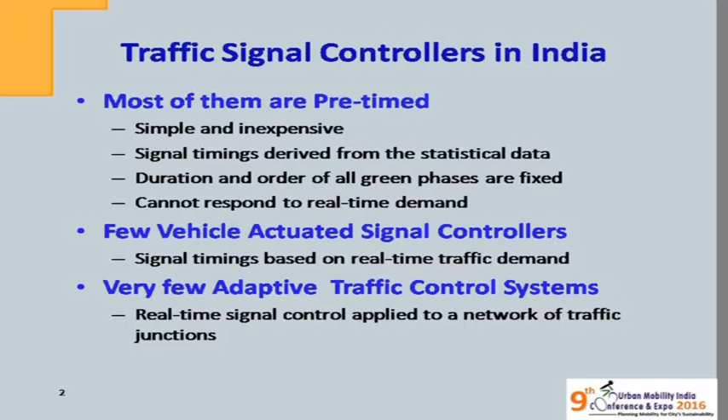And very, very few adaptive traffic signal control systems. In adaptive traffic signal control systems, real-time signal control is applied to a network of traffic junctions. So let's briefly see what all these things are. The pre-timed traffic signal control system is pictorially represented in the slide. This has no real-life interaction.

A lot of signal programs are developed based on the statistical information for different time slots of a day and different days of the week. And the signal control equipment simply looks into this timetable, and based on the time and day, that is executed.

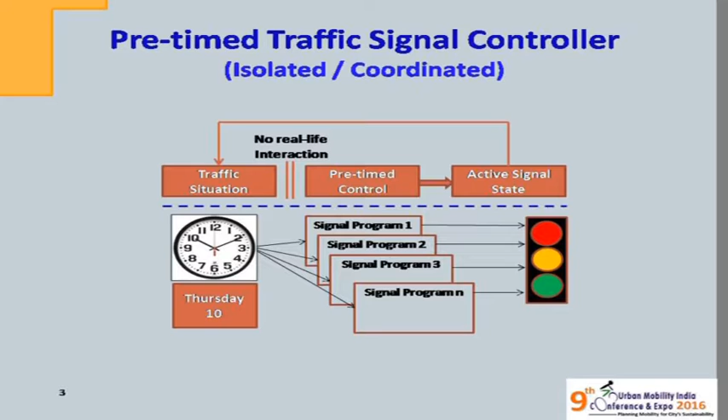So the result of this kind of system is it can cause unresolved queues, and probably we all have experienced that the green signal is shown to a road where there's no traffic, while unresolved queues are there and we are unnecessarily waiting on the other roads. So this is one major problem. But another advantage of this kind of signal controller is that it can be coordinated very easily. Signal coordination is a technique to reduce stopped delay and improve travel time.

Often we might have experienced that while driving on a corridor, at every other traffic junction we are getting a red. The moment we reach the signal, the green is lost and we are supposed to stop there. We wait for the green, drive to the next junction, and again we are getting a red. This can be easily tackled using a technique called signal coordination. This gives a progressive green signal at consecutive intersections when traveled at a specified speed. So that's a constraint: traveling at a specified speed or a design speed.

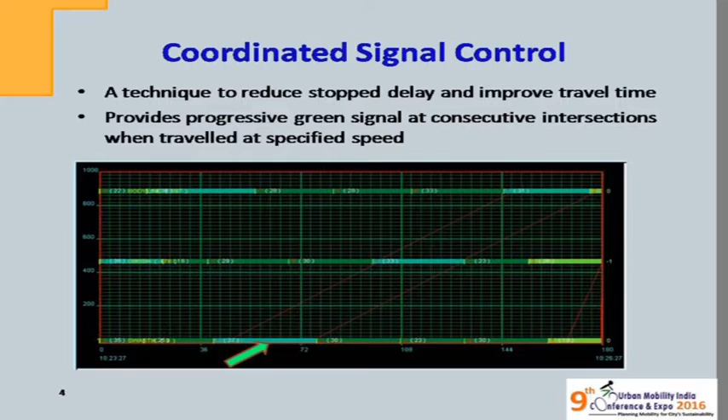Most of us might have heard of signal coordination, but there are a lot of myths about signal coordination also. The first thing is, we take a number of junctions in a corridor and try to coordinate them, so any type of junctions can be coordinated. That is the general thinking. But it's not like that. It has a constraint on the cycle length, that is, how much time is required to serve all the 4 roads if it's a 4-arm junction.

So we can bring the junctions into a coordinated group of controllers only if they have similar traffic characteristics, or they should agree on the same cycle length. Only then can they be brought under a coordinated group of signals. Another myth about signal coordination is that if it is enabled, all the vehicles getting the green at the first junction can go through the entire set of junctions without interruption. That also is not true.

Because another constraint in implementing it is the ground speed. There is a design speed, and there is a practical speed also. The practical speed varies depending on the congestion, because speed is a function of the density of the traffic. So at the most, we can expect 70 to 80% of vehicles getting the synchronized signal while traveling on a corridor. And another thing, people expect that it can be synchronized in all directions. That also is not possible practically.

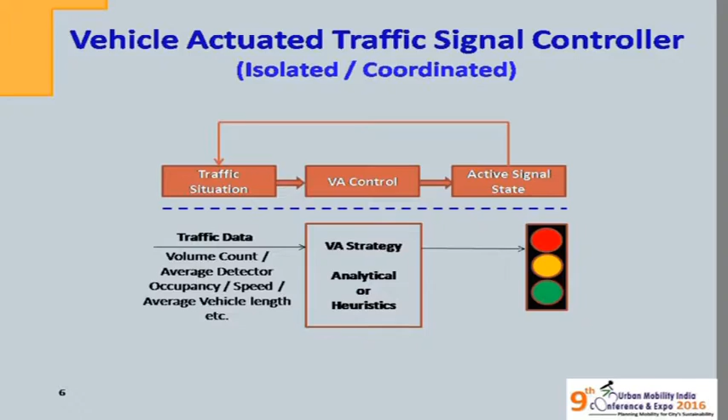Now we come to the vehicle actuated signal controller. That's another type of advanced controller we have. Vehicle actuated signal controllers use vehicle detectors to assess the real-time traffic demand on the road and accordingly modify the signal timings. So there is a real-life interaction. Traffic data is collected, like vehicle volume count, average detector occupancy, speed, average vehicle length, and that kind of thing. The signal can be vehicle actuated, but it requires at least 10 parameters if you are applying an analytical method.

And it is possible to have some heuristic methods where it can be realized with a lesser number of parameters, input parameters. For the vehicle actuated signal controller, we want to assess the real-time traffic scenario. And for that, we are using some electronics or some others.

And there are n number of different vehicle detectors available, starting from the inductive loop, which was the most popular one. In the inductive loop, across each lane, a wire loop is kept. And when a vehicle intercepts that wire loop, the change in the inductance is measured or identified by the electronics connected to it. And that identifies that's demand or that's a vehicle.

It's cheap. It's difficult to implement because it's intrusive. We need to cut the roads and put it and seal it. And it's easy to get damaged also. And then the camera-based system came. So some video analytics is used, and that identifies the motion detection.

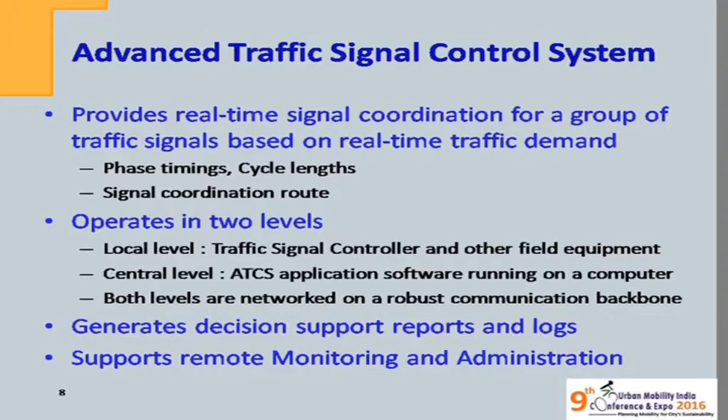So now what is happening is, 99% of the decisions are based on perception. I say the junction is congested. How much congested? And is there a scope of improvement? So some data is required, and these advanced traffic signal controllers provide that information. And it supports remote monitoring and administration also.

So maybe there are 1,000 junctions in a city like Delhi. So it is possible to bring all the 1,000 junctions to a central common control and monitor and manage it from the center computer. So the ATCS also can be in different flavors. That is the traffic responsive system and the adaptive signal control system.

So the traffic responsive system selects an appropriate signal plan from a library of coordinated signal plans based on the real-time traffic demand. So if you look closely, this is more or less similar to the pre-timed signal controller, where we are having a set of timetable, and based on the time, the signal plans are selected and executed.

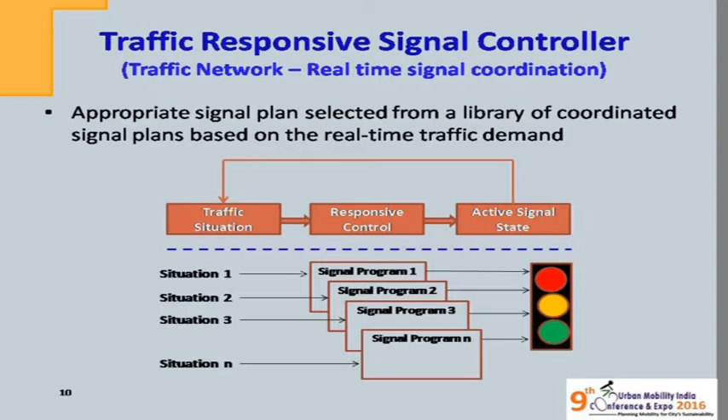So the adaptive signal control, this is a real-time system that collects the traffic data and generates the signal timing and appropriately coordinates it in real time. So there are at least a dozen different operational models available across the world on the adaptive signal controller, starting from ACS Lite, Balance, InSync, LATCS, Motion, OPAC, RHODES, SCATS, Scoot, UTOPIA, and CoSiCoSt.

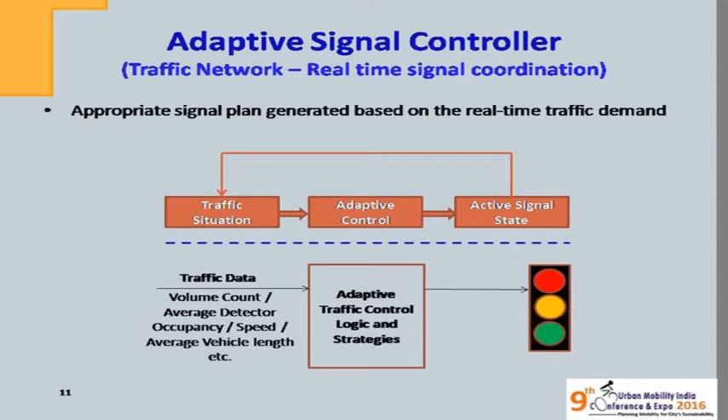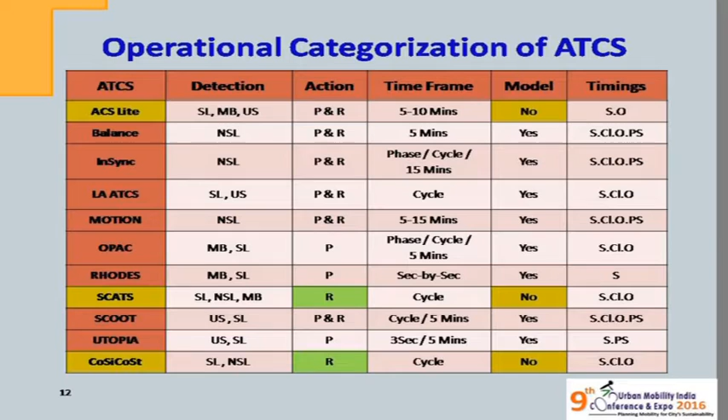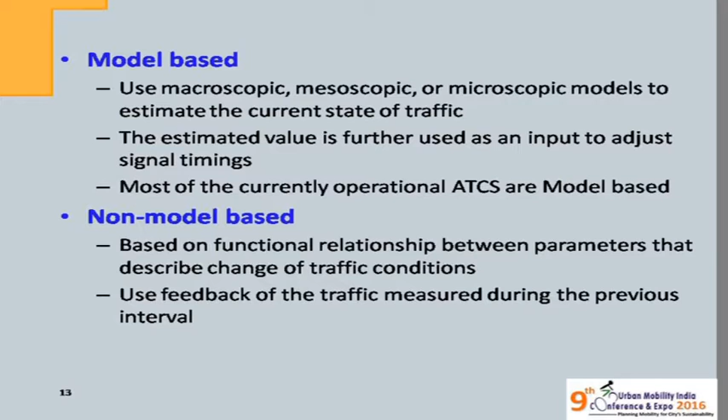So it is again model-based and non-model-based. See, the model-based depends on some microscopic, mesoscopic, or macroscopic models. And the non-model-based are based on functional relationships between parameters that describe the change of traffic conditions.

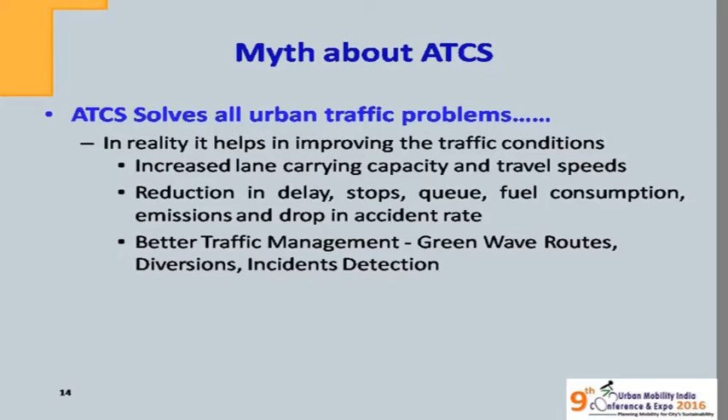And with ATCS also, there are a lot of myths, like an ATCS solves all urban traffic problems. In reality, it is not like that. It increases lane carrying capacity and travel speeds, reduces delays and stops. And all the ATCS are not doing optimization on all the signal timing parameters. So some of them do some optimization, and some use heuristics, and some use a relational basis.

So a network of traffic junctions is divided into smaller areas, and the smaller areas are separately synchronized. So if you look at, we are having 3 models tried in India. So Scoot was tried in Delhi, Itaca is being used in Mumbai, and CoSiCoSt is used in Jaipur. Scoot is not operational right now, but Itaca and CoSiCoSt are running. And this CoSiCoSt was tried in Pune also, so it was working till last December, I remember, and after that, some administrative issue, it's not there.

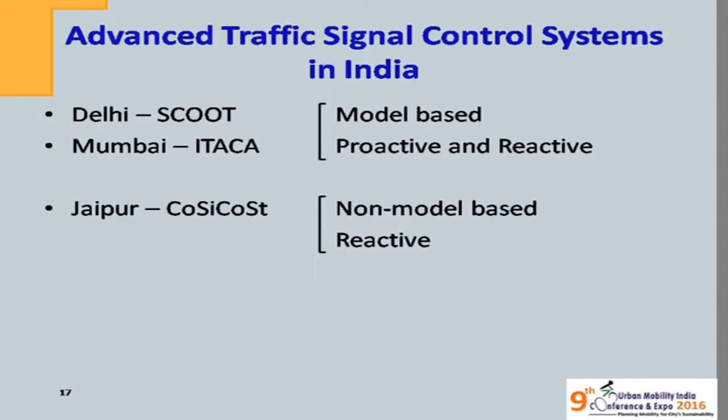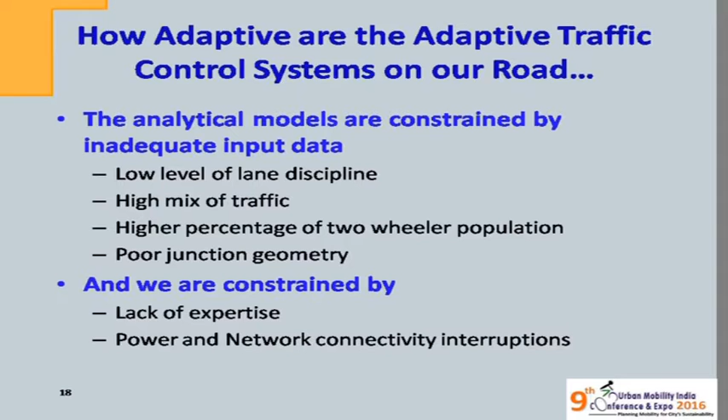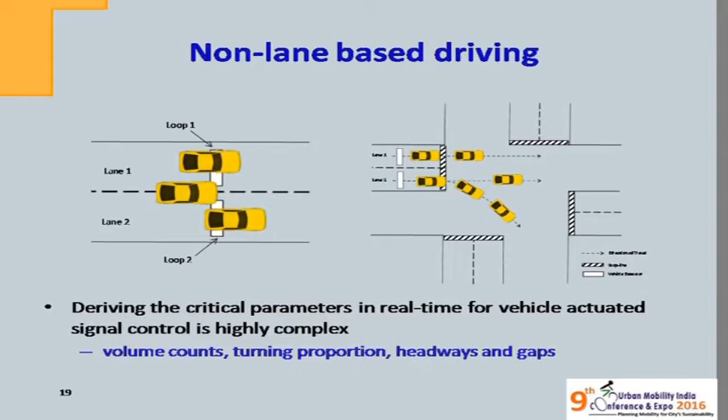And so if you look at what is suitable for our country, we are having this non-lane based driving, that is, the lane change can happen after the stop line, and the detection, on the left-hand side, you will find the loops. One car is intercepting 2 loops, or one loop is intercepted by 2 cars. So taking the volume counts, turning proportion, headways, gaps, all those things are difficult. And if it is a mixed traffic flow condition, again, collecting parameters is very, very difficult.

And the calibration is very much complicated in analytical models. We need to have n number of parameters taken, and a lot of assumptions are also there. This is from the Telvent side, Telvent Adaptive Signal Control, which is used in Mumbai. So we need to know the volume count at least 7 to 10 seconds before the vehicle reaches the stop line. And the assumption is that there is no lane change happening within that 100 meters or 120 meters. But in our case, the lane change happens even after the stop line.

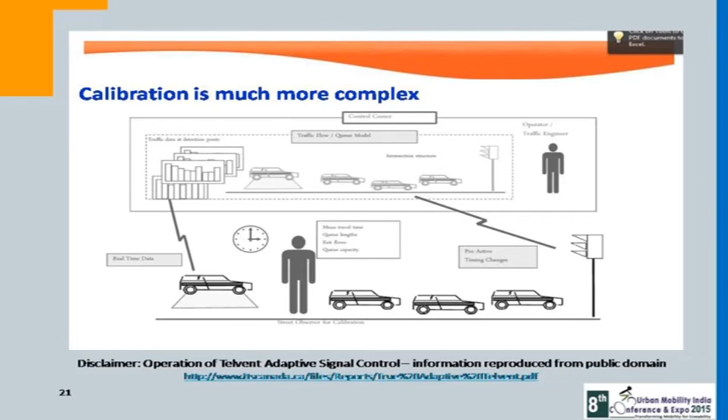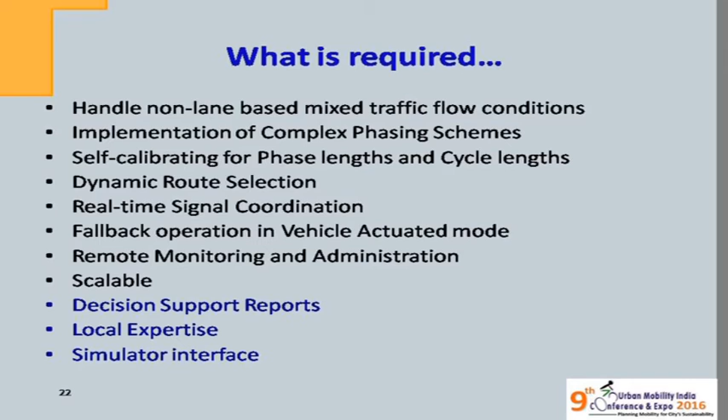So what is required is, handle non-lane based mixed traffic flow conditions, implementation of complex phasing schemes, self-calibration of phases and cycle lengths, dynamic route selection, real-time signal coordination, fallback operation in vehicle actuated mode, remote monitoring and administration, and scalability also. Because in our case, implementation funds are coming in piecemeal. So whenever there's some funds, you should be able to expand it. And decision support reports and local expertise are very much important. And there should be a simulator interface also.

And the relevance of the topic is the adaptive traffic control system is one of the major components of all the smart city mission projects coming up. So we need to critically look at what we are going to implement and what we are going to procure for our roads.